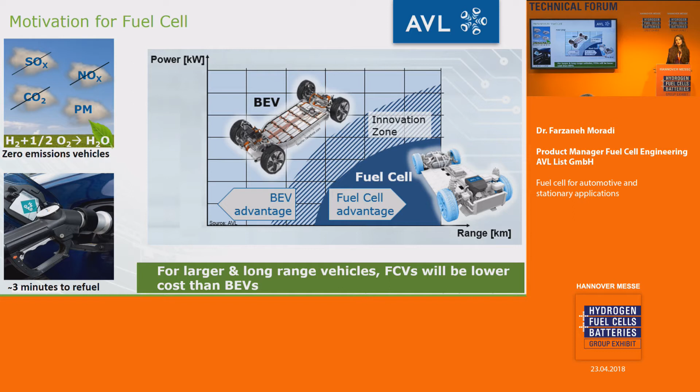Well, these are the slides about the motivation for fuel cells, which I don't think it's necessary to explain, but the diagram I put gives you a snapshot of AVL's view about fuel cell vehicles. We believe that for the range of less than 350 kilometers, battery electric vehicles make much more sense. And for bigger vehicles and longer range than 350 kilometers, fuel cell vehicles make much more sense.

At AVL, we started our fuel cell business in 2002, so we already have 15 years of experience in this field. We have around 120 engineers working on the fuel cell project, and we have been working with different customers from different segments, from passenger cars to commercial vehicles, and also with different suppliers, Tier 1 and Tier 2.

During the past 15 years, we have developed our PEM fuel cell product line, and also our solid oxide fuel cell systems. In solid oxide fuel cells, we have two different product lines. The first is our APU, or range extender, and the next one is our stationary fuel cell power generator. As you know, PEM always works only with hydrogen, while with solid oxide fuel cells you can use different types of conventional fuels, like diesel, gasoline, LPG, CNG, and so on. So during the past 15 years, we developed these three product lines at AVL, and we can support our customers with these three different systems.

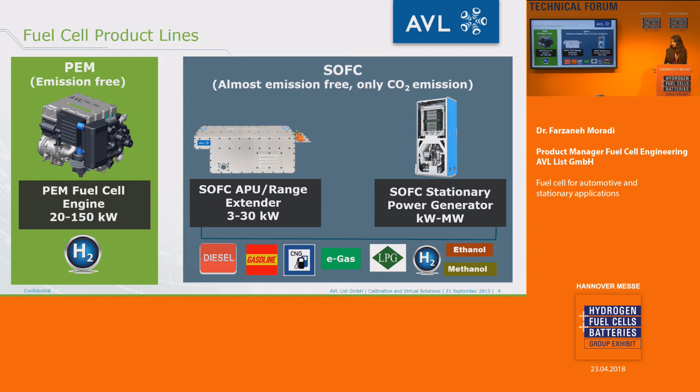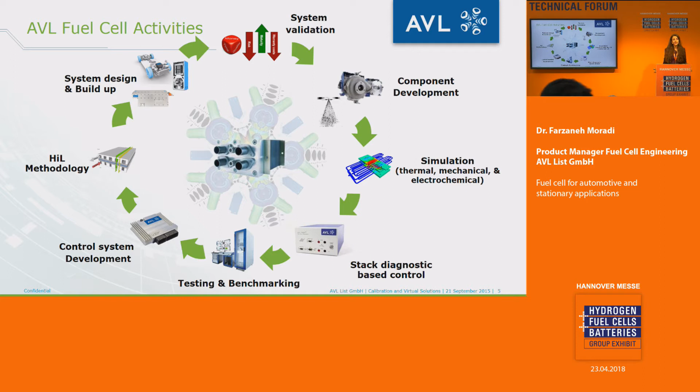What we can do for our customers - I'll start from the right side of the circle. We can support customers with component development, simulation, diagnostics of the fuel cell stack, testing and benchmarking, control of the fuel cell system, which is one of the most challenging parts, hardware-in-the-loop methodology, and of course system design, build up, and validation. These are all the AVL supports we can provide our customers with.

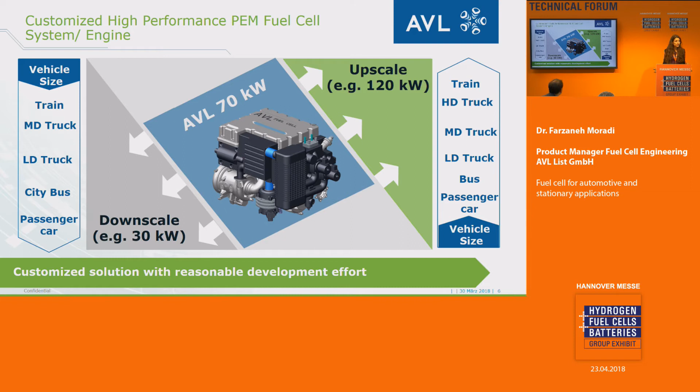For the PEM fuel cell system, internally we have developed a 70 kilowatt system, which we can downscale to less than 70 kilowatt, 40 or 30 kilowatt. We can also upscale this system to more than 70 kilowatt, up to 100, 120 kilowatt. So if we upscale our system, you can use it for passenger cars, buses, low duty, medium duty, heavy duty trucks, and also trains. And if you use the downscaled version, you can use it as a range extender for passenger cars, for low duty and medium duty vehicles, and also for trains.

What are the USPs of the AVL PEM fuel cell system? Our system has high efficiency. We are using passive hydrogen recirculation - in some fuel cell systems they use a pump, but we use a passive recirculation unit for introducing the hydrogen. With this passive unit, the energy consumption is lower, therefore the efficiency of the system is higher. So our system has a high power density.

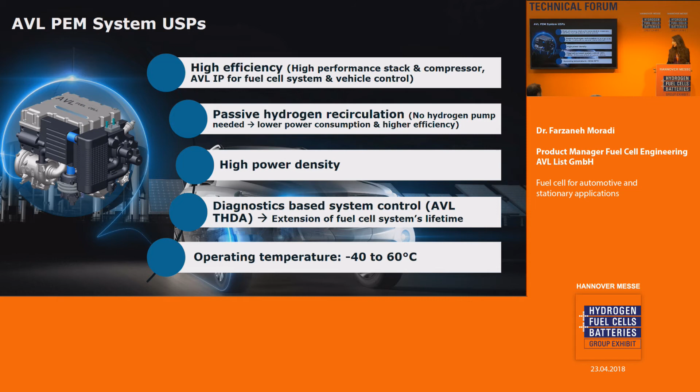We have a patent for the diagnostics of the fuel cell stack. The stack, as you know, is the heart of the system, and it's the most expensive part of the fuel cell system. Therefore, you need to take care of your stack as best as possible. AVL developed a patent for diagnostics of the fuel cell stack that lets you detect different failure modes in your fuel cell stack on time, before you hurt the stack. Also, our system is capable of working in a temperature range from -40 to 60 degrees Celsius.

AVL also developed the fuel cell test beds and test system. If you visit our booth at D60, you can see also our test beds in virtual reality. You can put the goggles on and go to our test beds and really understand what our test beds are.

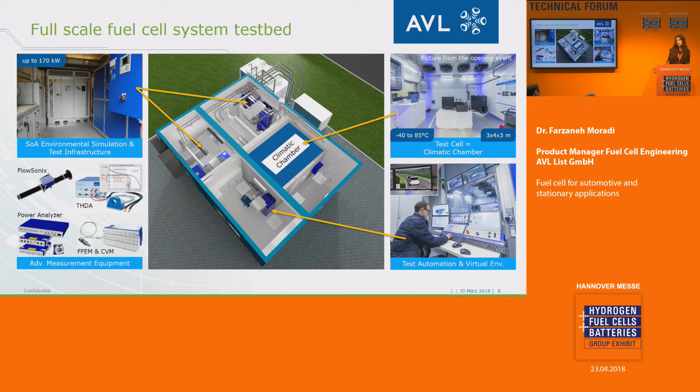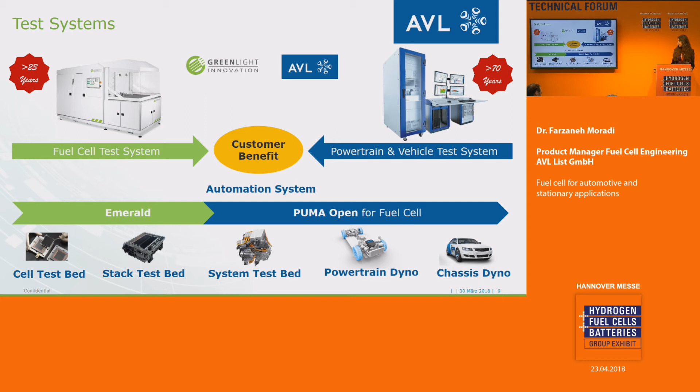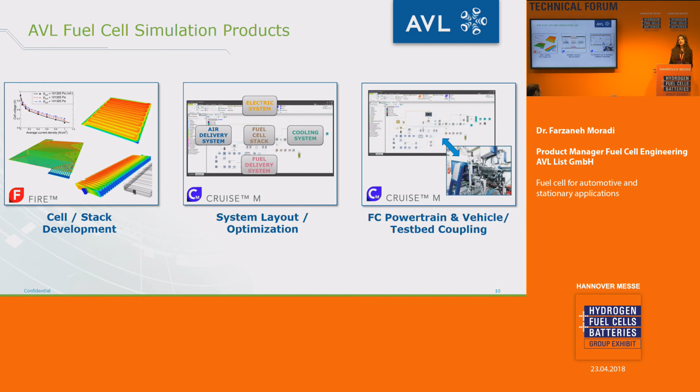We have also developed various simulation tools from the cell, stack to system and powertrain and vehicle that you can also see, our simulation capability, in our booth.

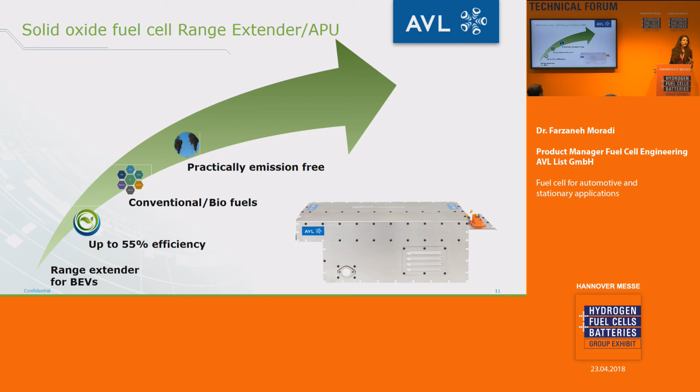Beside PEM, we have been working on the solid oxide fuel cell as a range extender or as an APU, and the efficiency of our system is up to 55%. You can use different conventional fuels from diesel, gasoline, LPG, CNG, ethanol, methanol, biofuels for this system. It's practically emission-free. The only emission that you have is CO2, but due to the high efficiency, the amount of CO2 from this system is lower than the amount of CO2 from the engine. No PM emissions and also very low noise.

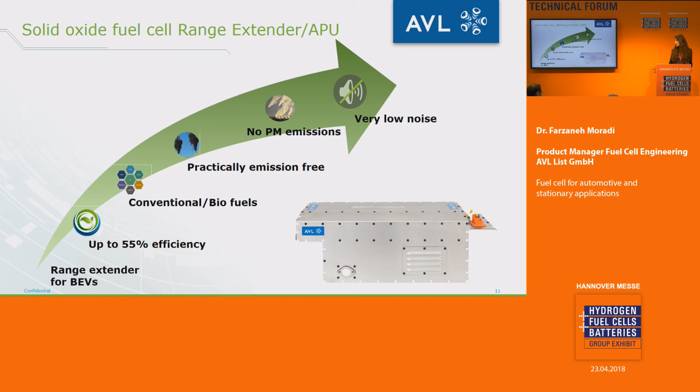With all these propositions that this system has, it's capable of being used in the passenger car, light-duty commercial vehicle, and also in military applications because of very low noise and high efficiency.

One of our reference projects for our range extender system is the system that we have developed together with Nissan. This vehicle was directly presented by the CEO of Nissan at the Rio Olympics 2016. This is the first solid oxide fuel cell vehicle in the world. The type of fuel is ethanol. The reason Nissan started to work with ethanol is that the first market for this vehicle is South America because of the high availability of ethanol. But of course, other regions can use this fuel because you can simply buy ethanol basically everywhere.

We've got different project examples, but due to confidentiality, unfortunately I cannot name them. Let's say the first project is the AVL PEM fuel cell concept car. It's an AVL demonstrator. The next one is the PEM fuel cell passenger car with one of the OEMs. The other one is the support of an OEM till start of production.

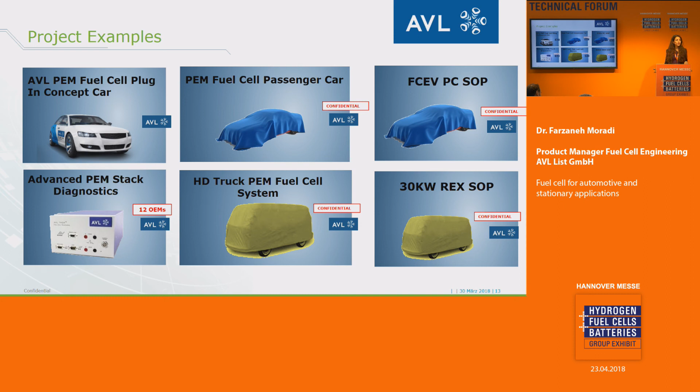We sold this diagnostic device to 12 different OEMs so far for stack diagnostics. And we've supported an OEM for a heavy-duty truck PEM system, and also another OEM for a 30 kilowatt range extender, again till start of production.

And the last product line I would like to introduce is our solid oxide fuel cell combined heat and power. This is a stationary power generator. You can use different fuels. The highest efficiency that you can get is with natural gas, so you could get an efficiency of more than 60%. For this system, our USP is, of course, the component development, system design, and the control of the entire system.

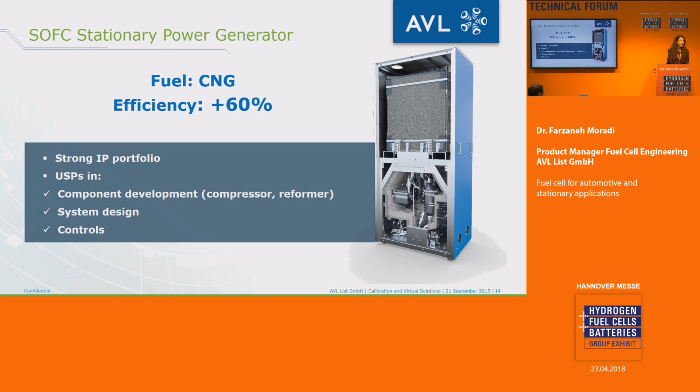For the CHP, we have been working with different customers in various ranges, from a few kilowatts till megawatt range, and these are different designs of our system.